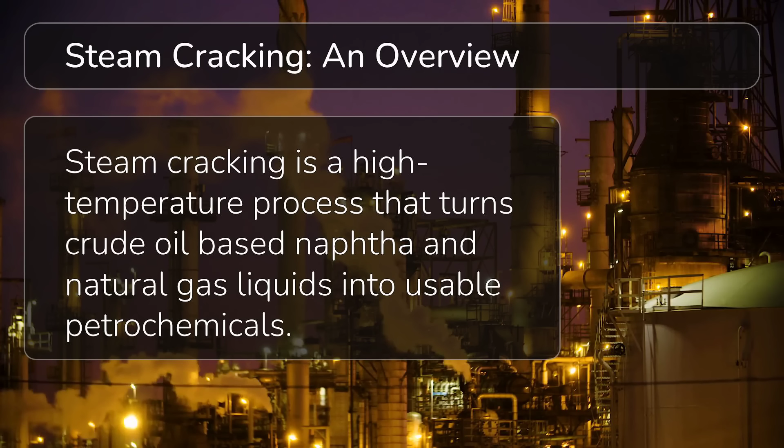Steam cracking is a high-temperature process that turns crude oil-based naphtha, as well as natural gas liquids such as ethane, propane, and butane, into usable petrochemicals such as ethylene, propylene, butadiene, and more. The choice of feedstock heavily dictates the volume of petrochemical co-products that will be produced.

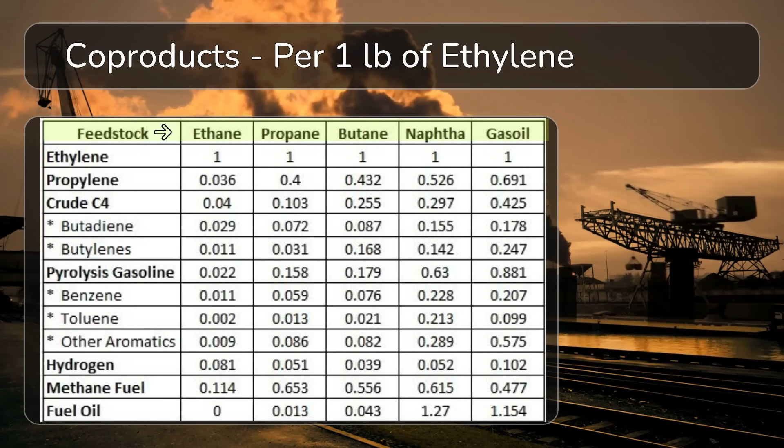As an example, this chart shows for each feedstock to produce 1 pound of ethylene, it generates an X amount of co-products. We use ethylene as the baseline as ethylene production is the primary focus of these steam crackers, given ethylene is the strongest in global demand.

However, the co-products as shown, such as propylene, butadiene, benzene, and so on, can also add tremendous value in direct sale or be converted downstream into other petrochemical products such as acrylonitrile for ABS plastic, or butadiene for synthetic rubber for tires, or benzene for bisphenol A to make polycarbonate.

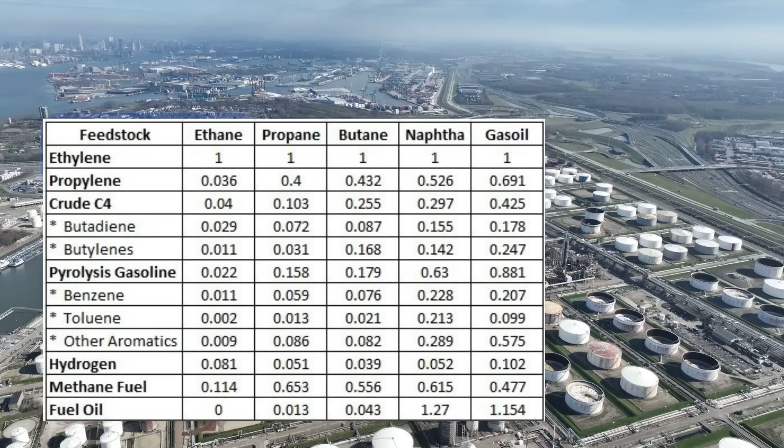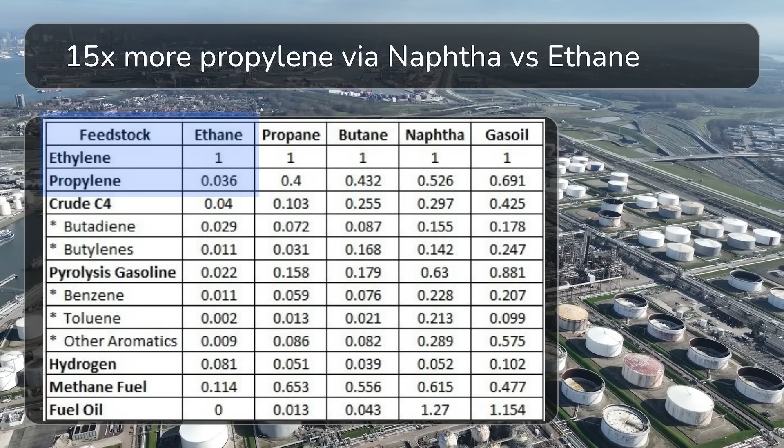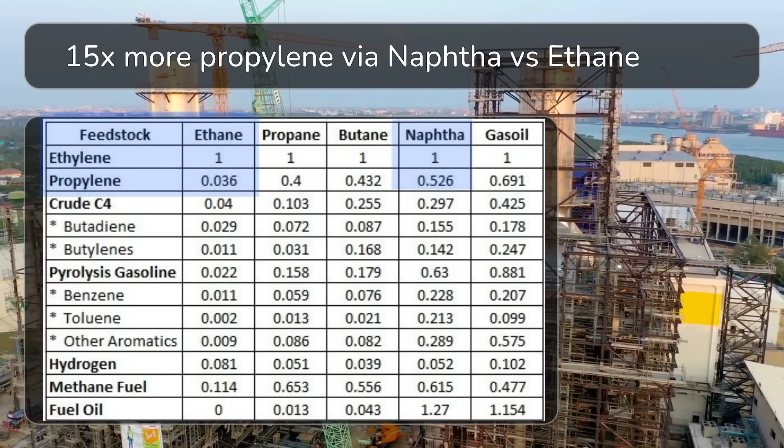To demonstrate the importance of the steam cracker's feedstock selection, let's discuss a propylene example. An ethane feedstock steam cracker produces 1 pound of ethylene with 0.036 pounds of co-product propylene. However, a naphtha feedstock steam cracker produces 0.526 pounds of co-product propylene when producing 1 pound of ethylene. That is almost 15 times more propylene co-product produced via naphtha-based steam cracking versus ethane-based steam cracking.

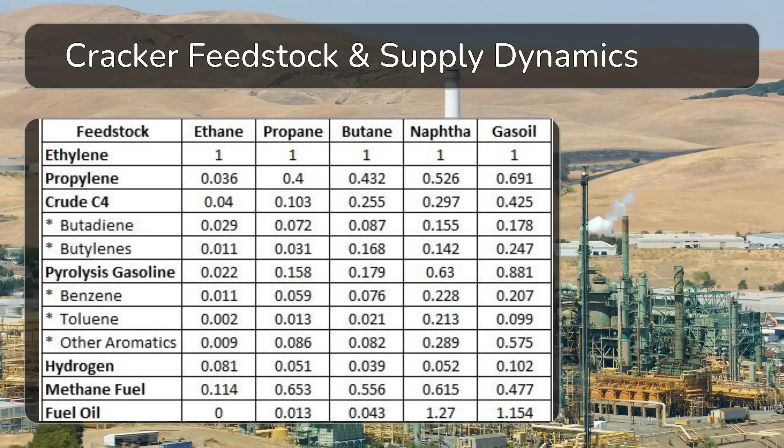Understanding what the preferred cracker feedstock is in the market, based on the overall value of the various steam cracker co-products, can help you determine what co-products will be produced more than others. This gives you a window into the future of upcoming supply dynamics. It's also a big reason why supply and demand of these co-products can become imbalanced.

Now, with this said, not all steam crackers are built to handle all these different types of feedstocks. Some steam crackers are flexible and can take all feedstock types. Some may only accept natural gas liquids such as ethane, propane, or butane, while some may only be equipped to handle ethane feedstock.

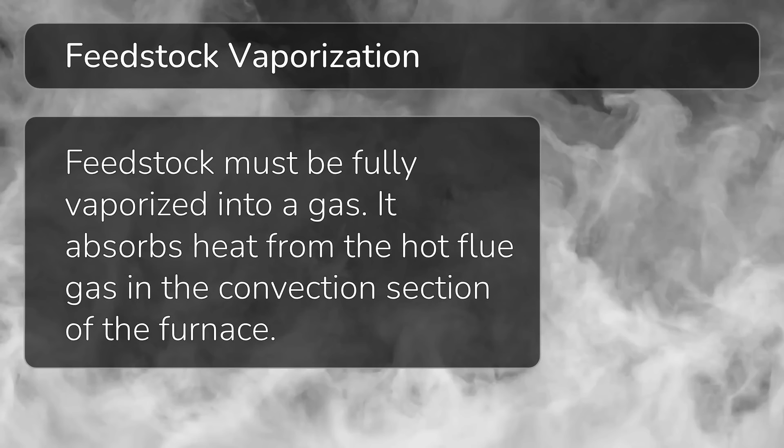In either case, the selected feedstock before entering the steam cracker must be fully vaporized into a gas. This requires prepping the feedstock just above its boiling point, where the feedstock passes through the convection section of the furnace. The radiant furnace is what allows the feedstock cracking to take place. Natural gas combustion heats metal coils containing the selected feedstock, raising temperatures to 850 degrees Celsius, which is needed for cracking reactions to occur efficiently.

The vaporized gas only passes through the furnace for just a second. That is just enough time for thermal cracking to take place. The feedstock breaks into molecules like ethylene, propylene, butadiene, and more. Immediately following the thermal cracking, the co-products are cooled to 525 degrees Celsius to stop the reaction and preserve the ethylene and propylene olefin yield.

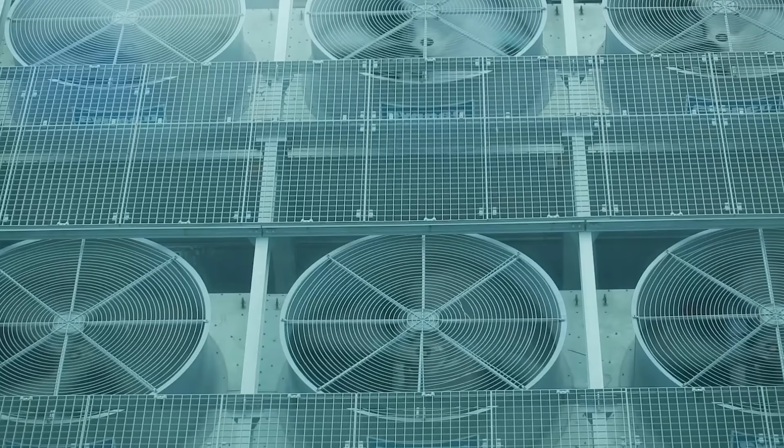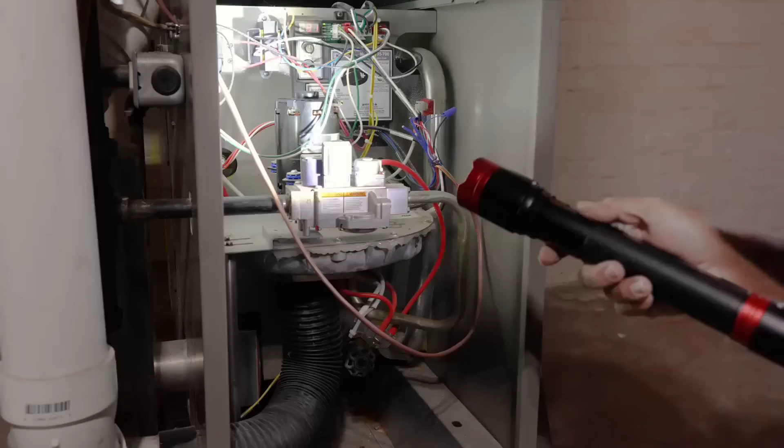Then the vaporized gas is further cooled, where pyrolysis gasoline starts to get separated out in its liquid state from equipment called knockout drums at temperatures around 120 degrees Celsius. This pyrolysis gasoline has value as it consists of hydrocarbons such as pentane, isoprene, hexene, hexane, benzene, toluene, and xylene, which are crucial for petrochemical production as well as gasoline blending. These are also important to remove because they could damage or disrupt downstream equipment like compressors if left in the gas stream.

Now that the pyrolysis gasoline is removed, the cracked gas, now consisting mostly of methane, ethane, propane, and a crude C4 stream, is compressed at 35 bars of pressure to prepare for cryogenic separation. The compressed gas is routed to a cold box, where it's chilled at temperatures below -150 degrees Celsius. This is where the fractionators come into play.

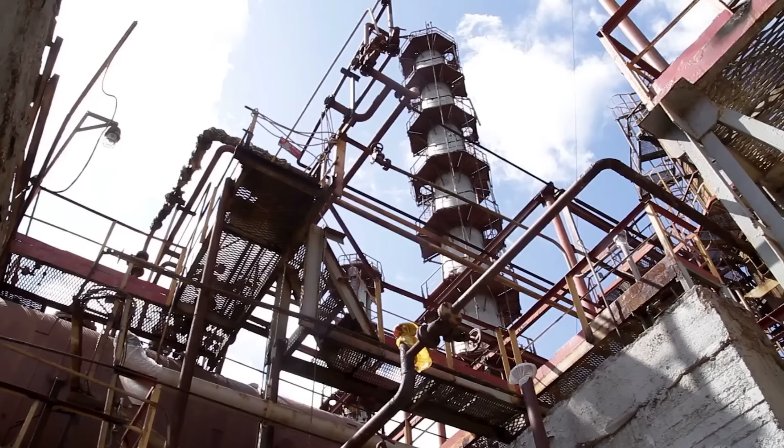A fractionation column is a very tall distillation tower. Inside it, vapor rises and liquid falls. Because different hydrocarbons boil at different temperatures, the column naturally separates them. That's the key to the separation phase. Based on the temperature in these columns, certain gas vapors will rise while heavier liquids with different boiling points will fall. The fractionation distillation columns we'll discuss are the demethanizer, the deethanizer, the depropanizer, and lastly, the debutanizer.

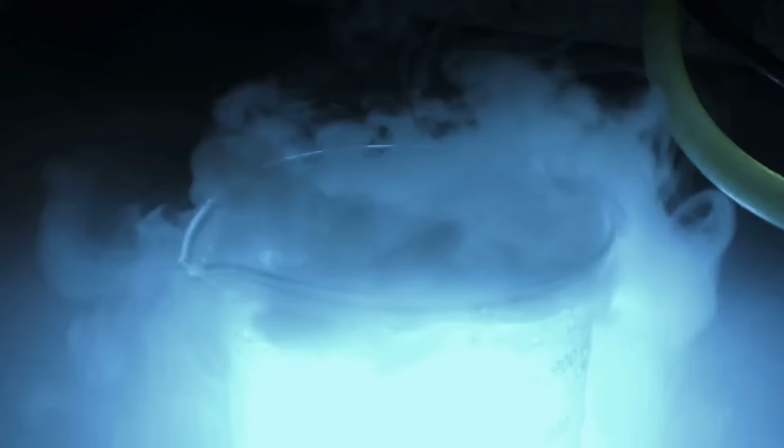First, the cryogenic cold gas enters the demethanizer where the temperature increases just enough, let's say -100 degrees Celsius, to separate out the streams of hydrogen, methane, and nitrogen by pulling these vapors from overhead.

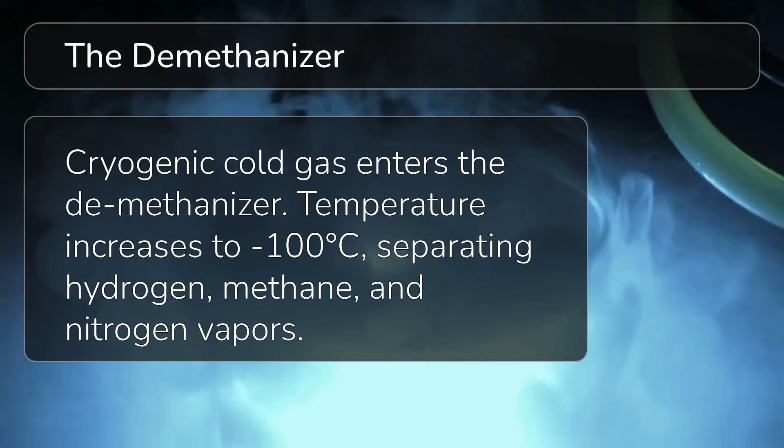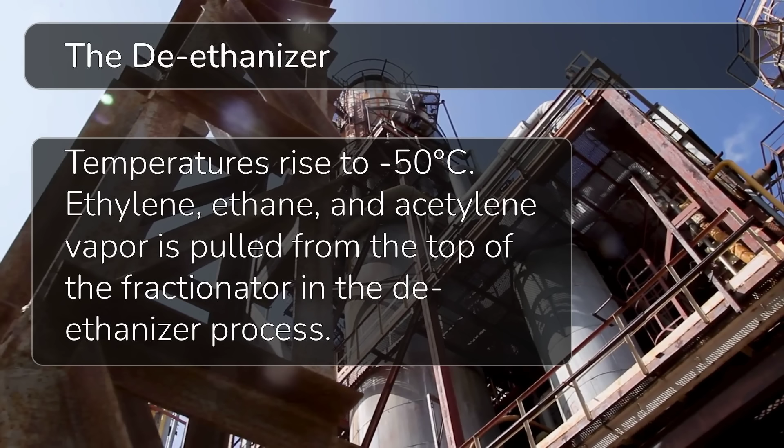While it's still cold, it's warm enough to allow the gases mentioned to be captured out of the top. The remaining bottom liquids such as ethylene, ethane, acetylene, propylene, propane, butane, and heavier are moved to the next fractionator, which is the deethanizer. The deethanizer is where temperatures rise more, let's say -50, where the ethylene, ethane, and acetylene vapor is pulled from the top of the fractionator.

The impurity acetylene is removed or converted to ethylene in a catalytic reactor to meet product specs. Acetylene needs to be removed as it can impact the ethylene polymerization process. The ethylene is then sent to ethylene splitters to purify the ethylene to over 99%. The bottom liquids such as propane, propylene, butane, and heavier move on to the next fractionator.

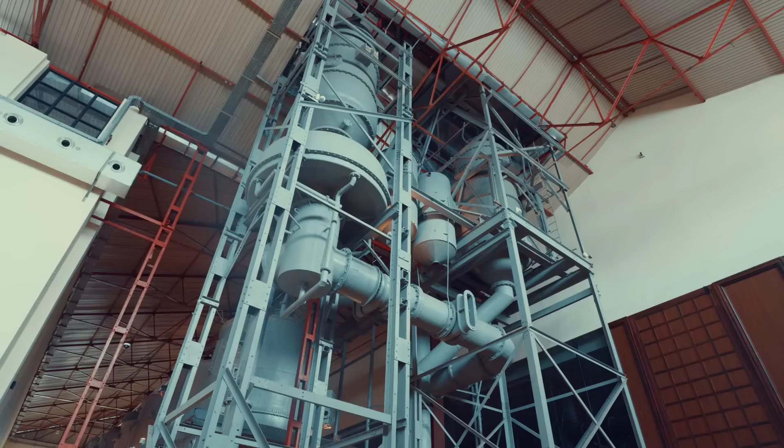The next fractionator is the depropanizer. This unit is slightly warmer than the previous unit, let's say minus 25 degrees Celsius. This fractionation column takes the gas from the previous deethanizer, which now consists of propane, propylene, butanes, butenes, and butadiene, and separates out the propane and propylene from the stream. The propylene can then be purified in a propylene splitter.

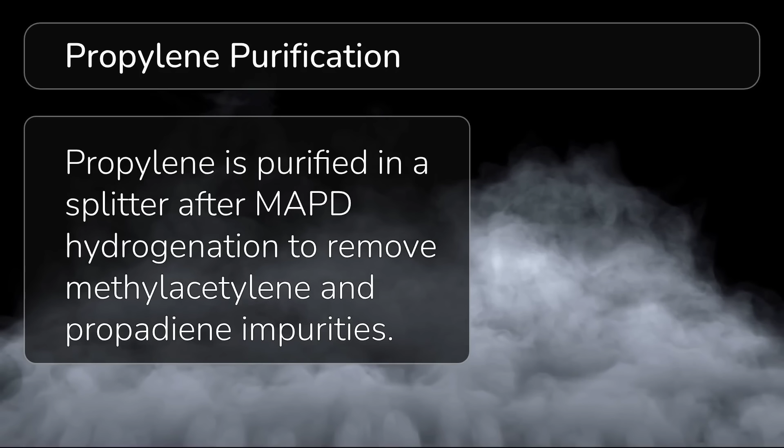Before propylene purification, it must be sent to a MAPD hydrogenation unit, where the impurities methylacetylene and propadiene are removed. These poison polymerization catalysts and lower propylene product quality, so it's essential they are removed. Once removed, the propylene is sent to a propylene splitter, where it can be purified to over 99.5% for polypropylene plastic production. The propane can be stored and sold for cooking or heating fuel.

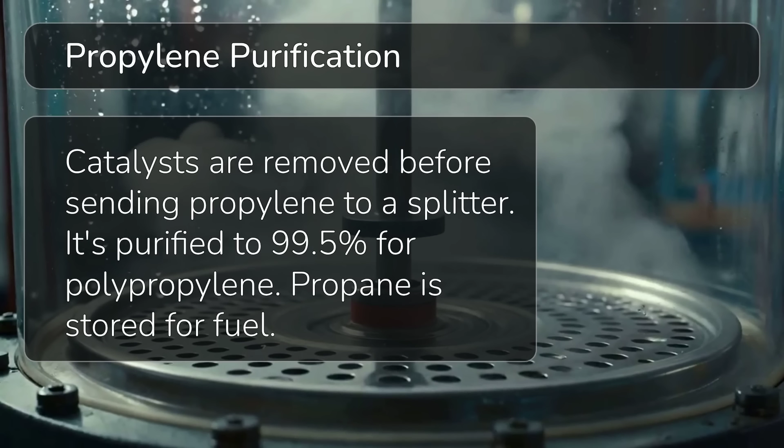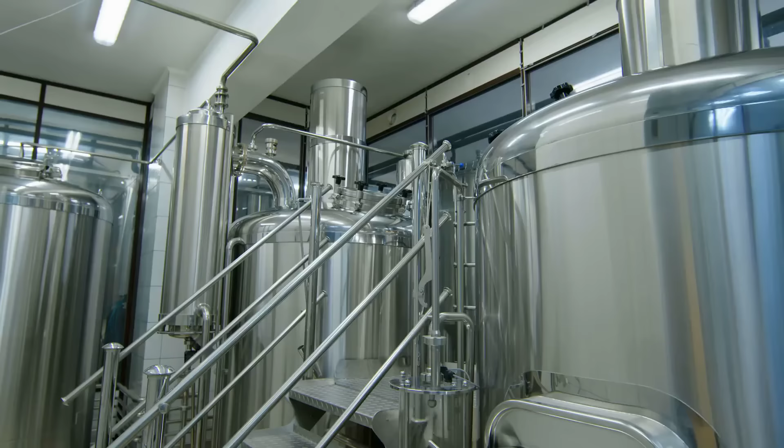The heavier butane-rich bottoms are then sent to the C4 fractionator and debutanizer. This debutanizer unit is slightly warmer than the previous unit. This fractional distillation column's primary function is to concentrate and recover the butadiene, butenes, and butanes as the overhead vapor. Let's start with butadiene extraction from the crude C4 stream. Butadiene's boiling point is similar to butene 1 and isobutylene, which means distillation doesn't separate butadiene from butenes very well.

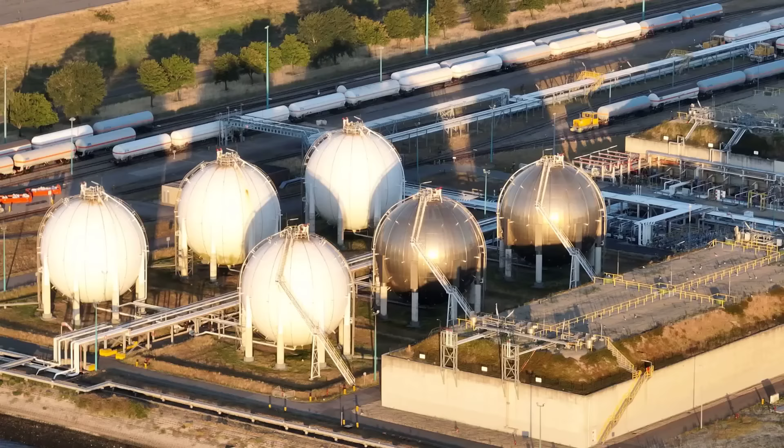This is where a solvent extraction process, such as using acetonitrile or dimethylformamide, comes into play. These solvents help extract butadiene out of the overhead vapor stream of the butenes into a bottom liquid stream for crude butadiene collection. This crude butadiene then goes to a purification process to achieve butadiene purity greater than 99.5%. Isobutylene is then also separated, where the isobutylene mixes with methanol to convert to MTBE, a valuable octane booster for gasoline.

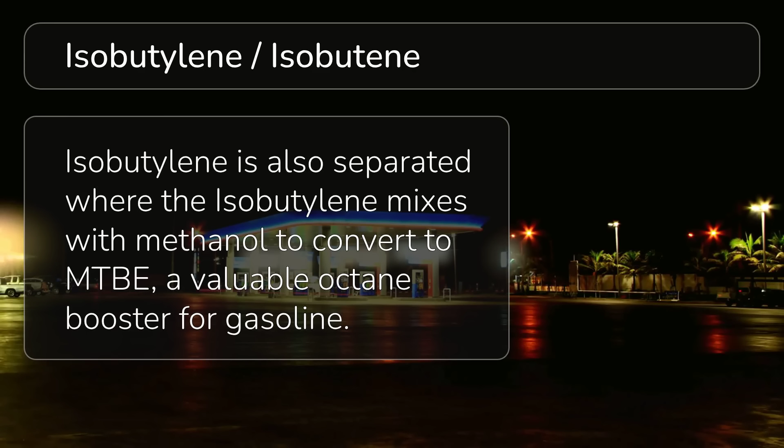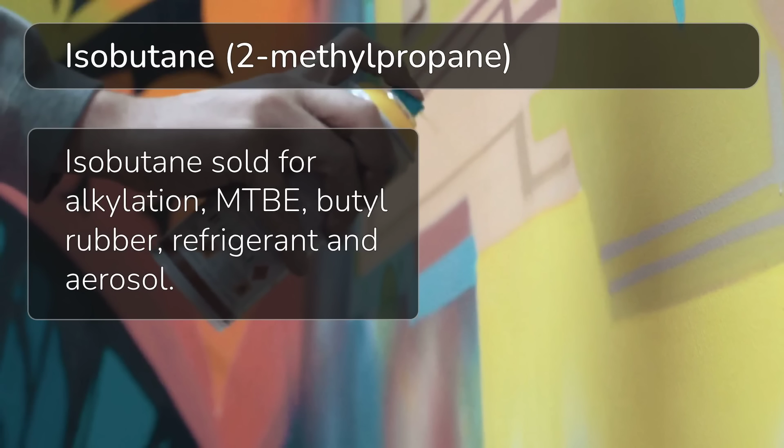Isobutane is also separated from the n-butane and sold to alkylation units for gasoline, or converted into isobutylene for MTBE and butyl rubber. Isobutane can also directly be used as a refrigerant, as well as in aerosol spray cans. The raffinate 2 stream of the crude C4, which consists mostly of butene 2 and some butene 1, can also be converted into butadiene, if so desired, by using oxidative dehydrogenation technology, ODH, which removes 2 hydrogens from the molecules using oxygen.

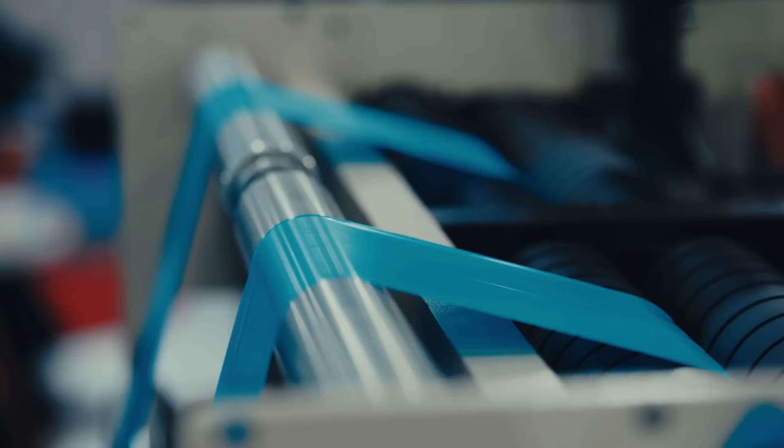The n-butane that is also in the raffinate 2 stream just tags along for the ride, however does not convert to butadiene. The n-butane, if over 95% pure, can then be used in LPG, which is a propane and butane mixture, used as a heating fuel locally and heavily exported around the world. The butenes, if not converted to butadiene, can be sold individually. Butene 1 can be sold to a plastics producer for density control in LLDPE and HDPE plastic films and containers.

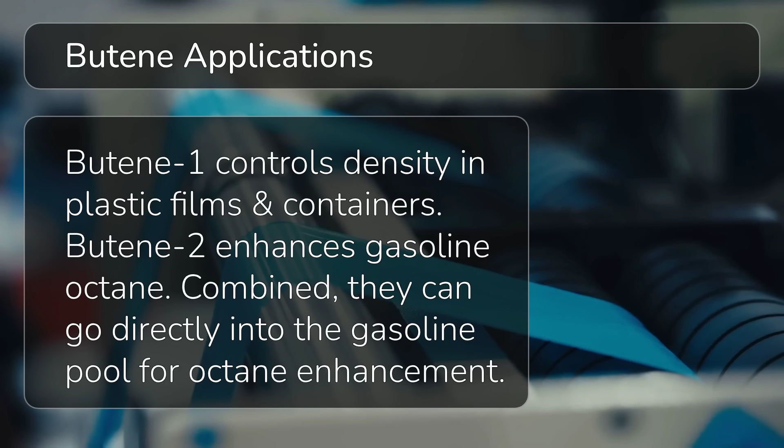Butene 2 is more used for gasoline blending, where it can be used directly into the gasoline pool for octane enhancement. Another option is to sell the raffinate 2 stream consisting of butene 1 and butene 2 directly into the gasoline pool. This would be safe to do now that the butadiene and isobutylene have been removed. The goal of the steam cracker is to turn crude oil-based feedstock naphtha, or natural gas liquids, into high-purity polymer-grade ethylene and propylene, while recovering the valuable co-products.

The steam cracker's feedstock selection can dictate what future co-products it wishes to produce more or less of. The demand of the consumer, which is you, regarding what type of product you are purchasing, plays a role in the demand dynamics that drive the supply strategy of the steam cracker. Now you know the building blocks of how gas and oil hydrocarbons transform into everyday objects, such as plastic bags, bottles, rubber for tires, carpet fibers, the foam in your chair, and much, much more.